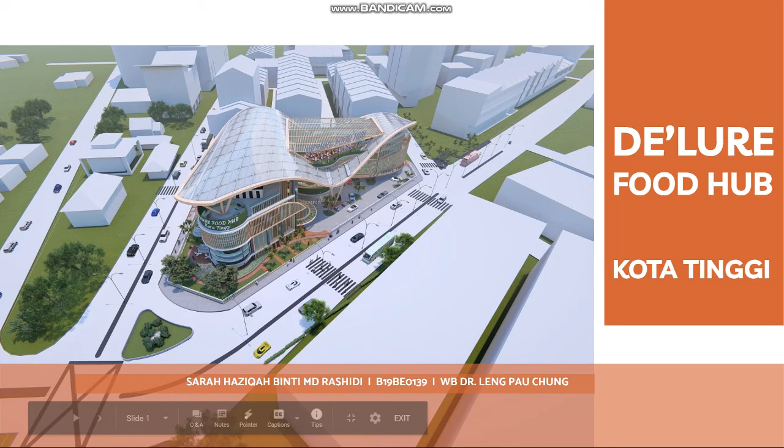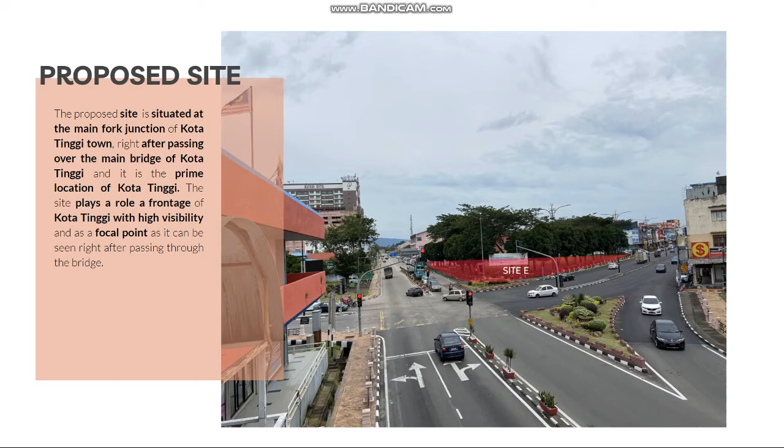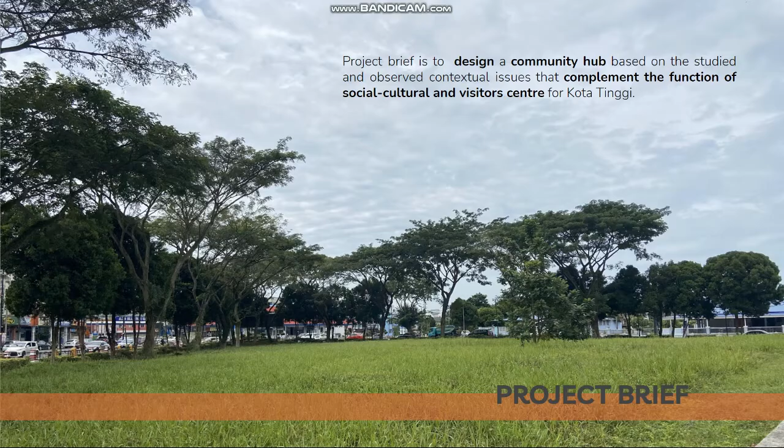The site is located at the main fork junction of Kota Tinggi and plays a role of frontage with high visibility and as a focal point. The project brief is to design a community hub based on the study and observation of contextual issues that complement the function of a socio-cultural and visitor center for Kota Tinggi.

The genius loci: Kota Tinggi is heaven for food. People come to Kota Tinggi for its famous restaurants such as Restaurant Mak Alam Seafood, Nasi Ayam Basir, Gerai Belangkas Mahkota, and many more. The problem statement is that younger generations are moving out of Kota Tinggi for higher education and job opportunities.

This leaves Kota Tinggi as a remote area with lack of development. Secondly, the Kota Tinggi area is exposed to serious flood during heavy rain season, causing locals to face huge losses. Thirdly, there are no proper business sites for locals to sell their products, so they face problems during rainy days and it's hard to find parking for customers.

Design concept: the food embrace. Food embrace gives the meaning of welcoming with open arms, to hold and hug the people, to create a bond between different generations with a food network.

The De'Lure Food Hub design is to tackle the issue of locals leaving Kota Tinggi for better opportunities. The building program intends to lure and embrace people back to Kota Tinggi with food and to create more working and learning spaces for all generations to improve their lifestyle through food production.

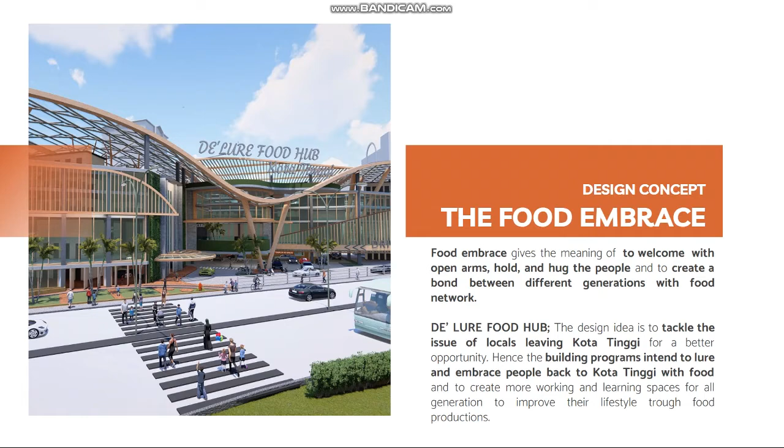The first design objective is to create a platform to help increase local economic income by creating more job opportunities. Secondly, to create a space that helps integrate the younger and older generations together, and to propose an ecotourism place that provides positive experiences by bringing nature together with the community.

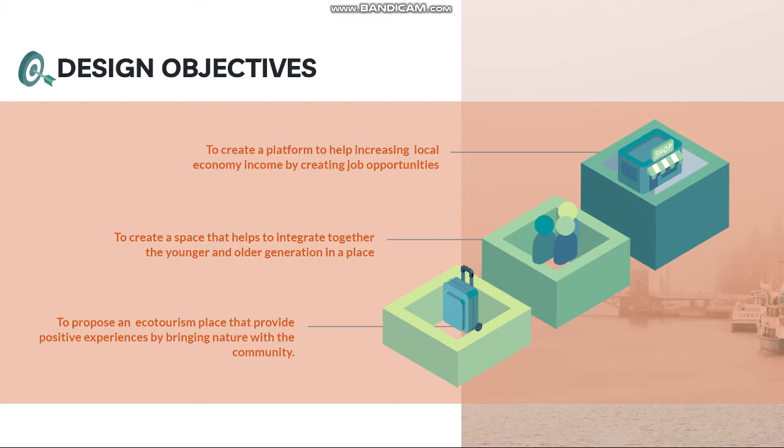Food connects people. How to bring people together is by luring them with food, embracing with food, and creating memories with food. So, the De'Lure Food Hub.

The organic design facilitates moments of tranquility and calmness in chaotic urban settings. The green environment filters disturbance from the outside and enables one to reconnect with inner thoughts and nature while enjoying mouth-watering Kota Tinggi famous food. Site analysis.

Site analysis determines the environmental factors surrounding existing buildings and activities. The design process starts with block massing from the site boundary, then it diverges and subtracts to form a visual approach and welcoming point.

The building is oriented towards Jalan Besar, the junction, and also Dataran Jam. There is a subtraction of building form to allow natural ventilation and to avoid flood disaster, as well as to add more green area spaces.

The curving and dynamic structure design embraces the building, creating visual continuity and a seamless boundary that draws people in. The design transformation is from a rigid form to an organic form to fulfill the design idea of luring people in.

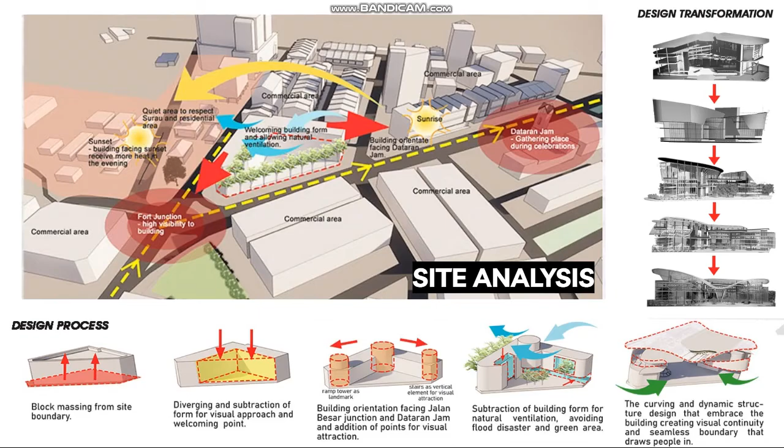The aim is to design a multi-purpose food hub for different generations to support locals in boosting their economy, as well as to provide a food place for family bonding, friends gathering, and creating memorable experiences.

The target users are mainly the Kota Tinggi local food traders, the locals, as well as tourists - a hub to gather younger generation with older generation in a food heaven.

The main target user is the locals, which include children, who will have fun, eat and play. The teenagers could participate in cooking classes, learning about food business.

Adults could have a proper place to sell their foods and gain more customers, and they can also organize meetings and events with proper discussion areas. Senior citizens get to relax in a nature-friendly environment, sharing stories and knowledge with the younger generation.

The building programs include workshops and classes, restaurants, cafe, food courts, food stalls, playing and activities area, the gallery, drive-through, and also food garden.

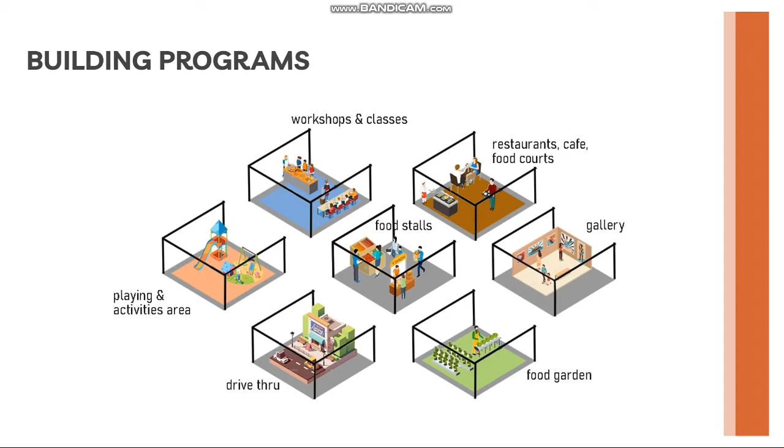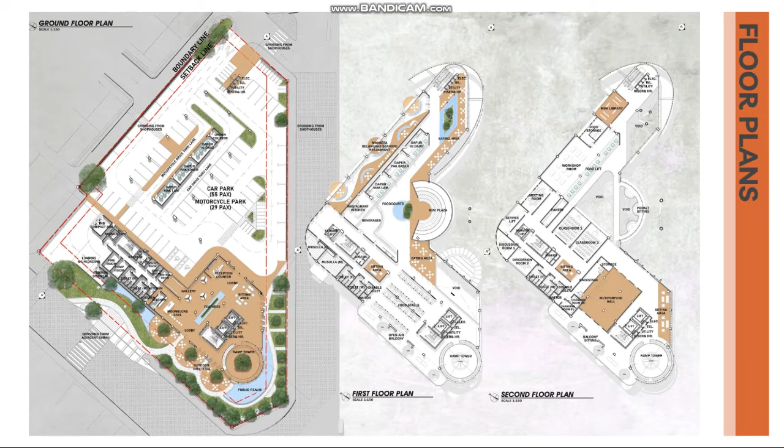Moving on to the third floor plan, there's the area of the mezzanine floor from the hall floor below, then a general office and director's office, meeting room, mail room, file room, and also a food garden with an open, rooftop-garden-like area.

Moving on to the fourth floor plan, there's an observation deck, rooftop cafe, then some food stalls, playground, and also public realm.

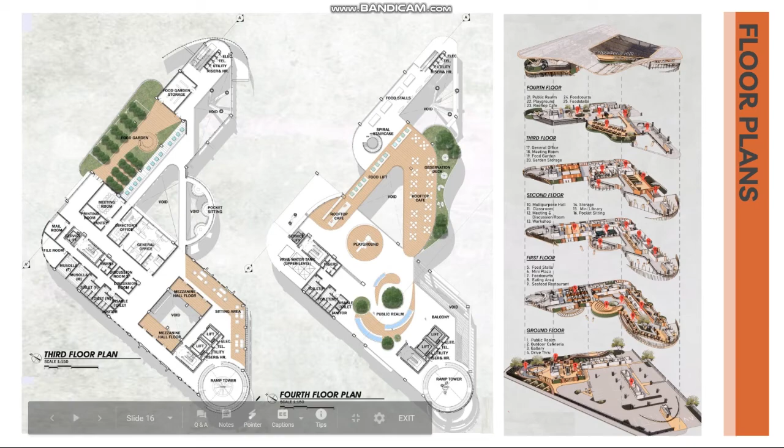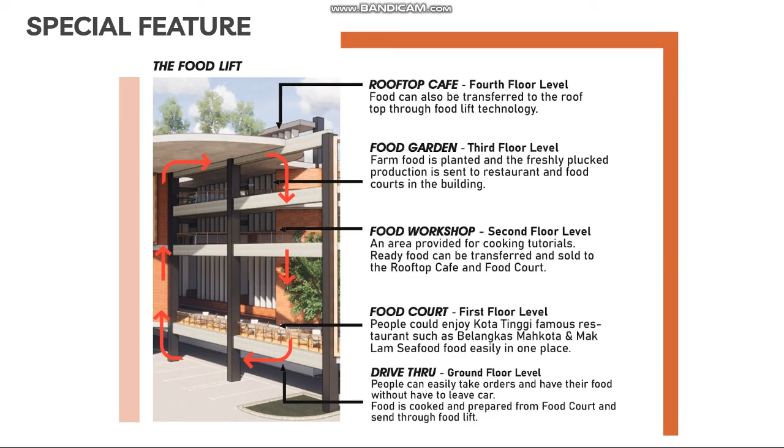The special feature in the building is the food lift, where food can be transferred from the ground level to the fourth floor level. The food lift connects from the lower ground to the upper level.

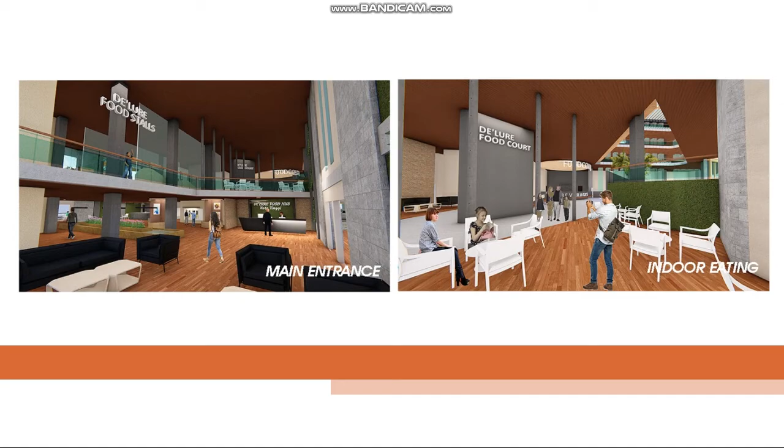Next, the main entrance. From the main entrance, we can see there is a signboard showing food stalls and food courts, which would direct people to the area.

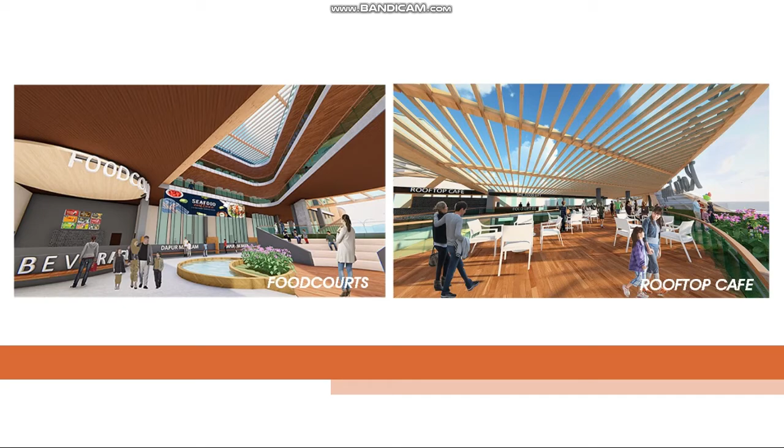The next picture shows the indoor eating area. Next is the food court with the atrium area and also the amphitheater where people can sit and eat.

Next is the rooftop cafe where people can have their food while enjoying the 360-degree view above the rooftop.

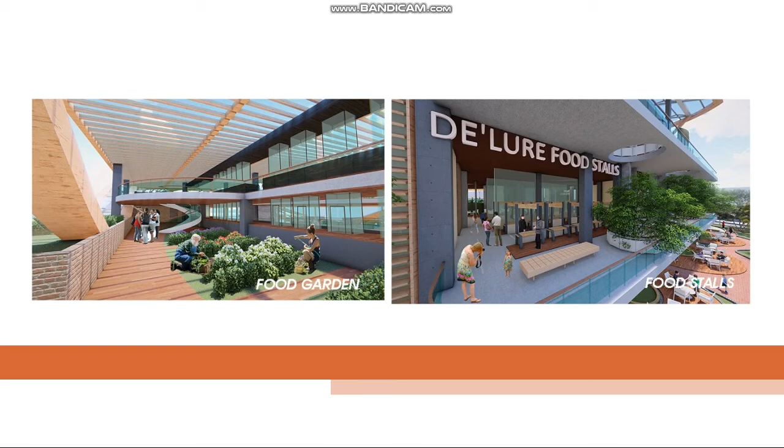The food garden: fresh food products such as vegetables and fruits can be transferred down to the kitchen, serving the customers with fresh foods.

Next is the food stalls, so people could sell their products, and it is easier for customers to come to a place where they provide variety of food in one place.

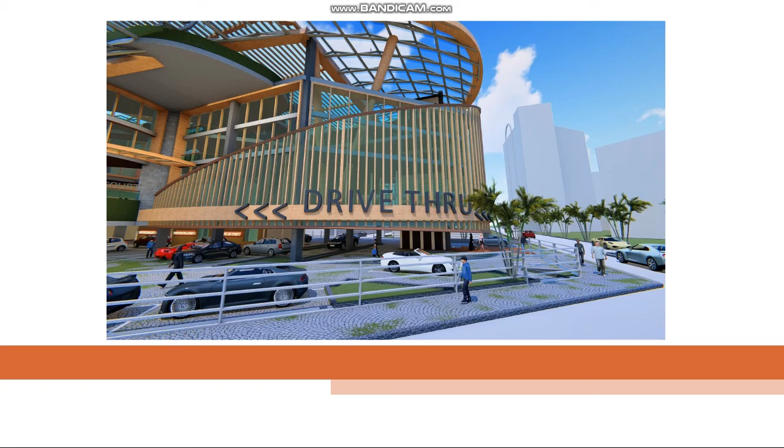Next is the drive-thru where people can just get their food, grab and go. Next, another perspective.

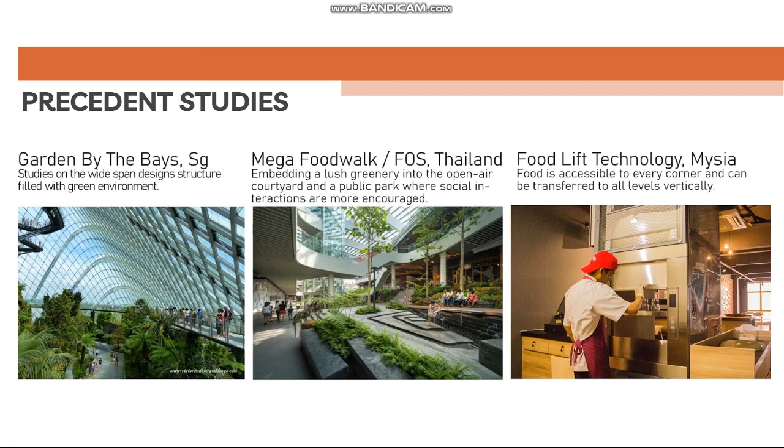And then the food lift technology, where food is accessible to every corner and can be transferred to all levels vertically. That's all from me. Thank you.